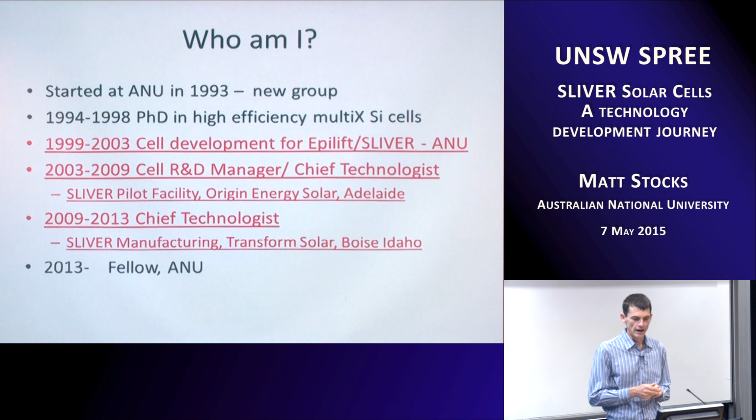I was lucky that there was a project starting, looking at single crystal silicon and trying to make very thin layers of it — the Epilift project. I started in that, which migrated into Sliver. A couple of years into that project, the idea of Sliver was born, and from 2003 through to 2013 I was involved in the cell R&D, and ultimately was Chief Technologist for Sliver technology at Origin and then Transform Solar. When that wound up, I came back again to the ANU.

So where did this all start? It all started with Epilift technology. The interest very much during the late 90s was: how can we reduce the cost of silicon? How can we produce high quality silicon layers which are thin and lower cost than traditional multi and single crystal silicon? The concept we were working on was liquid phase epitaxy.

Basically, you take a metal melt, dissolve your silicon in that metal melt, transfer that metal on top of your silicon, cool the melt down, and the silicon crystallizes out on the top surface. We make our solar cell on that top layer, and then we remove that top layer and reuse the substrate. That was the basic concept involved.

So why would somebody get involved in that technology right at the start? It was a really interesting time in terms of energy, because there was a really interesting greenhouse issue — this was really the start of companies starting to take it seriously. Origin Energy, despite the very negative views they're taking on solar in the marketplace now, were very focused on greenhouse because they saw themselves in a better position than most energy companies in Australia, since they were in gas rather than coal.

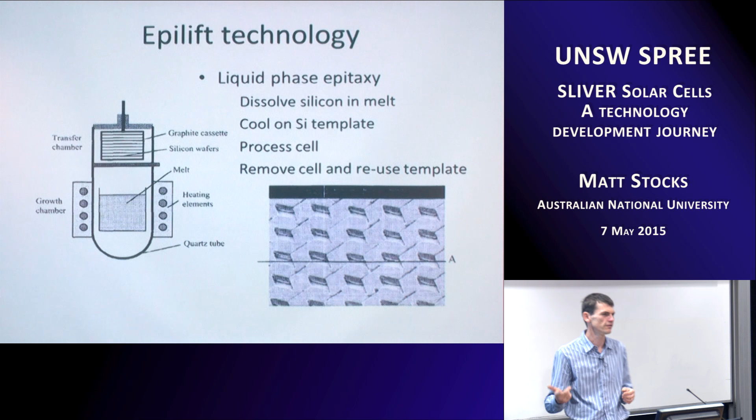So what happened after that? Epilift progressed quite well going through to 2000, and then the decision was really around how do we scale this thing up. What we had was a technology which required custom manufacturing tools — we had to design and build a tool that could take multiple wafers, insert them in the metal melt, grow our silicon, and get them back out again reliably. And we had to do this again and again, because there was only value in it if we could reuse that template multiple times.

So Andrew and Klaus were coming on the train back from Glasgow, sitting there thinking, look, it's working, but is there a better way we can do this? What they really focused on was: what's the cheapest way to make silicon? And the cheapest way is the way the solar industry does it — in terms of cost dollars per kilogram, multicrystalline silicon and CZ silicon were the cheapest. So they started to think about ways to use conventional silicon but with a much thinner quantity of silicon in the final device. This is what led to the birth of SLIVER technology.

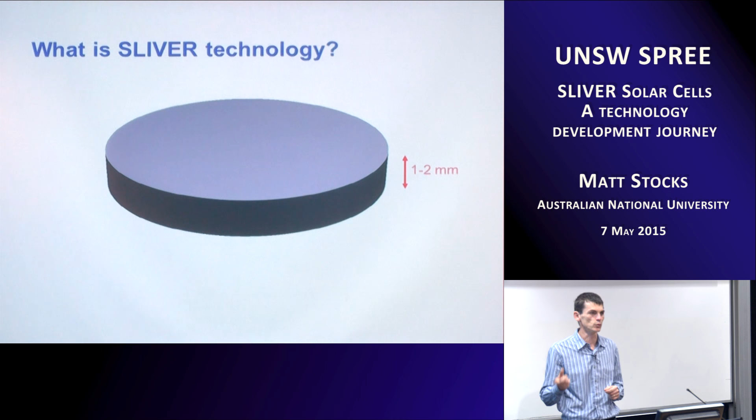With SLIVER technology, we take a standard CZ wafer, except instead of being 150 to 200 microns thick as the solar industry uses today, we're taking something 1 to 2 millimeters thick — quite a thick wafer. Then we micromachine it. We're taking advantage of the fact that silicon has this amazing property that in an alkaline etch, one crystal plane etches much more slowly than the others. We use this all the time for standard solar cells: if we take a 100 silicon wafer and etch it for the random texturing process, we create these 111 planes all over the surface which don't etch, compared to the 100 plane, the downward plane, which does etch.

With SLIVER technology, we've rotated our wafer on its side so those 111 planes are vertical, allowing us to etch very deep grooves, 100 times deeper than they are wide. If we do that cutting at a very narrow pitch, something on the order of 100 microns or less, we can get these strips of silicon forming within our wafer. This is what we're interested in — making solar cells with SLIVER.

The idea was then to process the cells inside the wafer, so you do all your cell processing while all those strips are being held together. And then at the end of the process, we can take that cell, tip it on its side, and get the big area increase that you achieve through this micromachining process.

So kind of imagine it a bit like a deck of cards. You take a deck of cards, it's all nicely packed together, doesn't take up very much volume. Take them on their side and you spread them out, and suddenly you get this huge area increase.

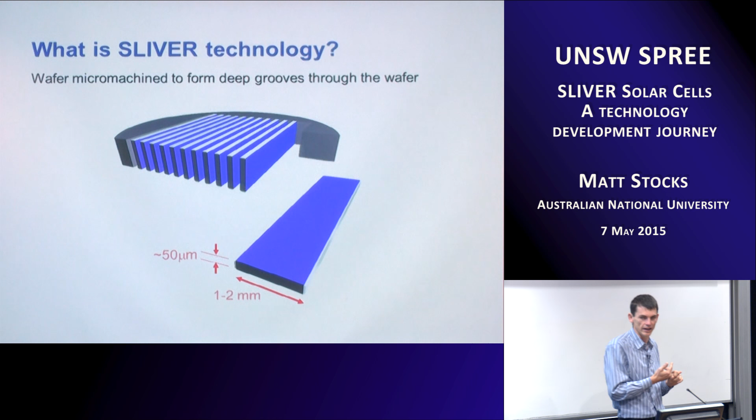And that's what SLIVER is about. We're taking the silicon, slicing it up into these narrow plates, doing all the processing while they're held within the rest of the wafer frame, and then separating them out and spreading them out. So we're getting both silicon saving, and importantly, we're also getting a number of watts out of each wafer that we process.

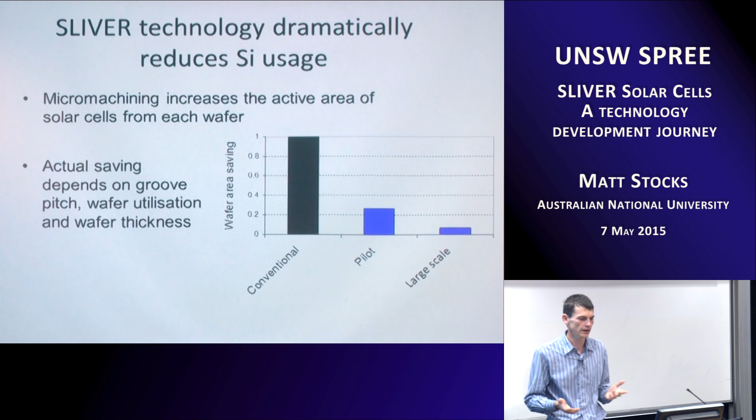What we did when we were at the initial phases of this, we already had got things down to around about 2 grams per watt, and then by the end of the process we were getting down to less than 1 gram per watt. So it was all about originally focusing on silicon saving.

The cell design also, because it was a very thin cell made out of single crystal silicon, it was very easy to make good cells. And we were naturally set up to have high voltage because we had a very, very thin cell. It was also very easy to get very good surface passivation on the surface of our cells.

We could do all of our processing in furnaces, LPCVD furnaces, oxidation furnaces, to get our processing down into the grooves of the wafers. Very good current. The cells are very, very thin, and we've got a collecting junction on both sides of the cells, so we have an emitter both on the top and on the bottom. So we only need 30, 40, 50 micron diffusion lengths to get the current from the centre of the cell out to our junction, so we get very good collection efficiency.

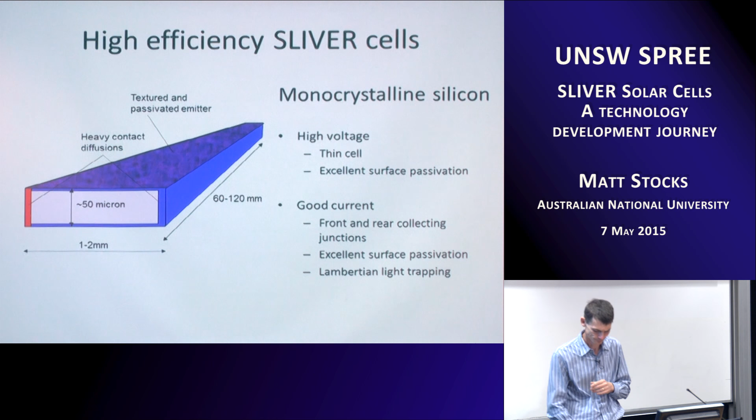It also enabled us to think differently about our module design, because we had a bifacial cell, we could actually try and use both sides of the cell. You can imagine when we take a cell out, it doesn't matter which way up the cell is—it's completely identical in terms of the processing. This is a truly perfectly bifacial cell.

So if we wanted the highest efficiency, we could just pack all these cells as close together as possible and cover the entire surface of our module. But we could also save our silicon even further by spreading the cells out.

So what we did particularly early on in the process was to actually take the cells and separate them and put a white rear reflector behind the cells. That way the light that hit the rear reflector was reflected back onto the back side of the cell, and we could then recover some of the light. You don't recover all of the light though, so it's back into a trade-off situation.

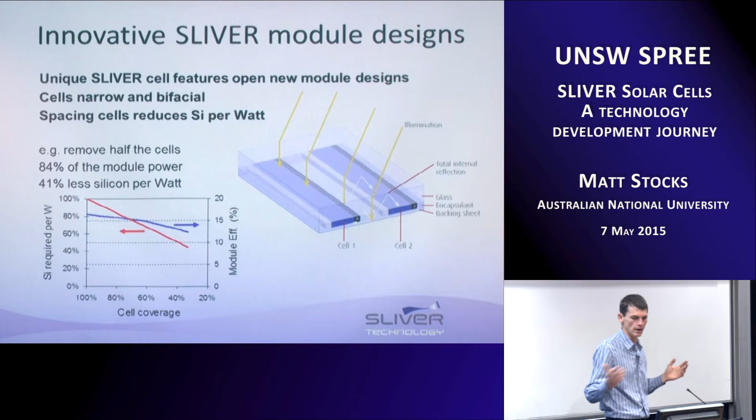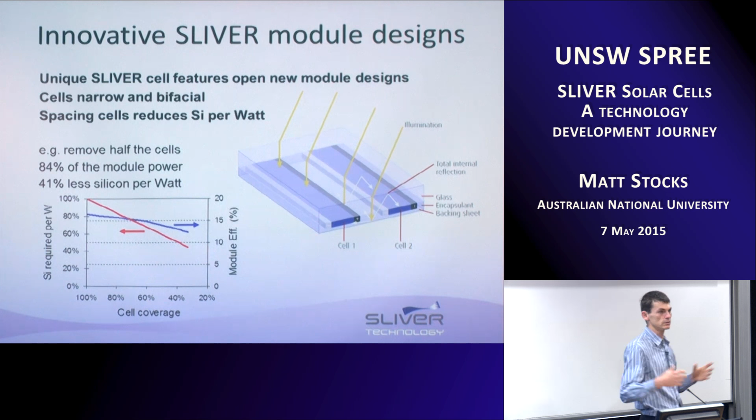By spreading the cells out—so the red curve there is imagining the cell, spreading the cells out and reducing the amount of silicon—as we spread the cells further and further apart, what we're getting is silicon saving, but the efficiency drops off much more slowly. So in terms of grams per watt, it's most beneficial to spread the cells out; that's the best economics.

So, a few years of playing around with that in the lab, we basically said goodbye to Epilift, threw it out, but kept all the milestones. We took the exact same project and said, instead of doing this with Epilift, we're going to do it with SLIVER technology. One of the reasons we could do that was that everything in terms of the cell processing was using standard equipment.

It was 80s vintage standard semiconductor processing equipment. It wasn't solar processing, but it was standard semiconductor processing equipment—using things like plating benches and wet benches for micromachining and furnaces and all of those sorts of things. We didn't have to build new kit, which meant that we could very rapidly use the existing facilities to process this cell. Unlike Epilift, which really meant that we had to go out there and custom build these new tools.

So we look along the experience curve a little bit further. Everything's behaving itself pretty well. The red dotted curve represents the general assumption that as an industry builds more and more of something, we get clever at building it and become more efficient. There's this classic experience curve, and what you tend to find with a lot of industries is that if you take the log of the amount of stuff you make versus the log of the price, you end up with something like a straight line. Solar, after the first few years of coming down, was behaving relatively well in terms of that curve.

We did our modelling and had a look at what we believed we could achieve with SLIVER cells, and there was a really good fit. There should be a really good margin in this business if we can succeed. So Origin committed to building a pilot facility in Adelaide.

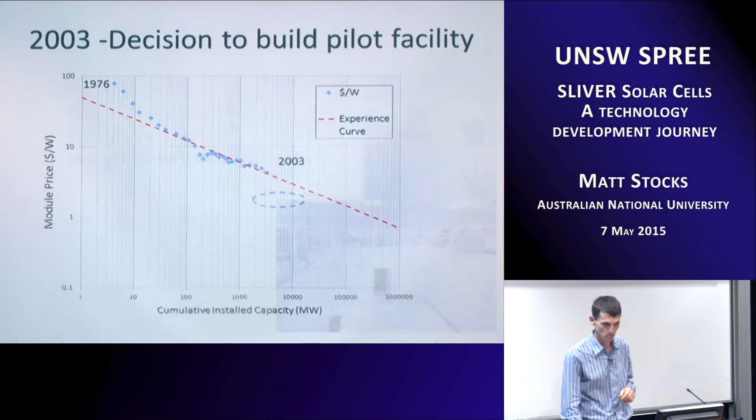So why Adelaide? Close to the researchers? Nah, not particularly. Good quality water? Everyone knows Adelaide water's top notch in an Australian context, no salts or anything else in it, nice and easy to process. Lots of high-tech industry, really good at making cars, pretty high-tech? Not really any of those reasons.

What I'll come back to is a theme I'll return to a few times: it's all about people. And in the end, the boss makes the decision. He wanted something that he could keep an eye on, so he wanted something he could jump in the car and nip down to see how the guys were doing today. That really was ultimately the decision why we were in Adelaide.

We had a look at Melbourne, we had a look at Canberra, we had a look at Sydney, but the generation group, which was the part of Origin all about developing new business, was based in Adelaide. They came out of South Australian Gas, and that was where the energy part of Origin really started. So that's where the head office was based, and that's where we ended up.

We started completely from scratch. We did a search for sites and ended up with an old paint warehouse. The reason it was great was that it was bunded. They didn't want spills or anything going wrong and escaping into the countryside, so the entire warehouse was bunded, which was ideal for chemical processing. Everything was going to be contained within this warehouse, and it was built completely from scratch.

So what you can see there is the overall warehouse. During the build, this is the assembly area where the modules were made, and this is the clean room space within that. And this is the yellow room for doing the photolithography during the build phase.

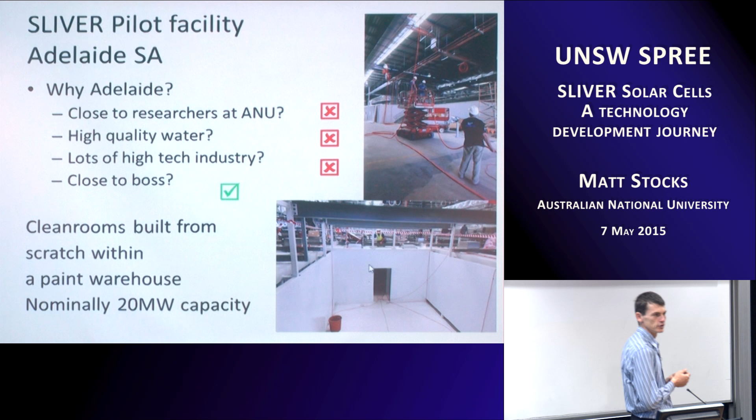So we progressed through that, and we had these two areas. We had the clean room area, which you can see, a lovely fishbowl arrangement, all set out nicely with the window so you could take guests in and show them what the monkeys are doing in the zoo. On the right-hand side you've got the assembly area, which was pretty much just an office space, class 10,000 to 100,000, for building modules. We weren't particularly worried about cleanliness there anywhere near as much as on the other side, which we treated much more like a semiconductor processing space.

Quite quickly we built the first modules. The first part of things, we took things from the lab and threw them into manufacturing, and it came together remarkably quickly. The original idea was not to certify, just to get a very limited number of modules out there with some controlled buys, get a couple of 110 watt modules out into the market, and just see what happens.

It didn't keep going in terms of plain sailing, and this is where we really ran into the challenge of guys who are in academia and used to being in the lab versus the reality of how you make lots and lots of this product—the thinking really is quite different. The first issue we started to crunch into was defects, particularly defects during the etching. Generally when we do processing, we don't care too much about one side of a wafer, and a lot of the semiconductor processing equipment is very much focused on stuff going on the top side.

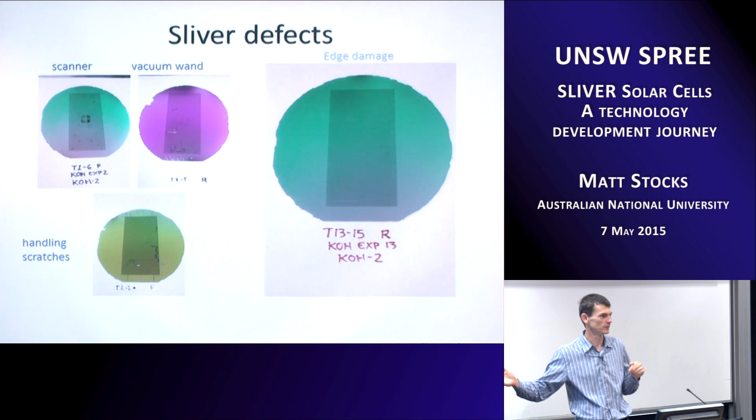And of course we then stick them in KOH etching for a long period of time, and we take what looks like you can't see the scratch at all to suddenly it just blows out the entire wafer.

We had a pretty poor cell design. We hadn't really thought through the issues. When we're building things in the lab, as long as some of them work, it's great, and we can sort through them and go, yep, enough of them work. Sometimes it does, sometimes it doesn't.

And the biggest one that we got caught was we were trying to use one of our masking layers for multiple purposes. We would keep using it for both our etching process, and then we were trying to retain it later on to define where our contacts were going to go. So we had this silicon nitride layer, which was on the top of our wafers.

We were etching down between these grooves, and there was a bit of undercutting. It wasn't much, only 5 to 10 microns of undercutting, because we wanted these really deep, narrow grooves through our wafer. But we had then this uncontrolled breakage - these would come off and land wherever they like.

So sometimes they would land nicely in the middle of the wafer and it didn't actually hurt anything, it didn't cause a problem. But some other times they interfered with the process. This is a good example of it here on the left - we had this nitride flap sitting on the surface.

We tried to do an oxidation to passivate the surface. The nitride blocks that oxidation. During some of the other processing, the nitride flap lifts off a little bit. There's no longer anything on the surface to passivate and protect it, and we get unwanted plating on those locations, which some of the time then also leads to shunting.

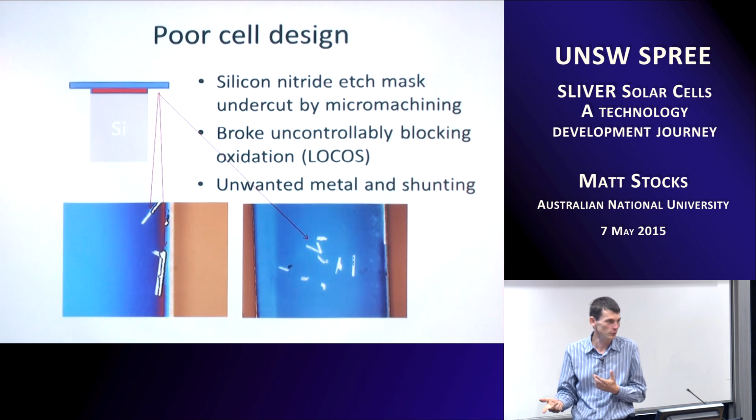So we started off with that sort of a problem. We also had a really bad module design.

What I talked about before was the fact that we spread the cells apart and that we wanted to get light reflected from the rear. In order to do that as efficiently as possible, we wanted that reflector to be as far back as possible, because if it was too close to the cells, it was hard for the light to get sideways - too much of the light was just going back out the same hole that it came in.

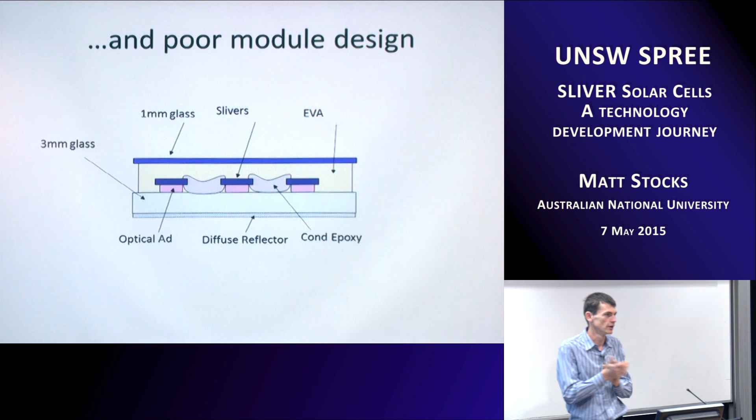So naturally, we went, well, we can just put that on glass. We'll put that separate from the cell, and to try and keep the weight down, we'll just put a thin layer of glass - a 1mm glass on the front surface. Of course, you can't toughen 1mm glass, it's too thin, so we can only use standard glass, but it's fine. We've got a 3mm glass on the rear - that's going to do all the strength work for us.

But we quickly discovered, once we started to go into the reliability side of things, that actually this doesn't work. We find that that front glass layer stresses too much. Hail test is a total failure - the glass separates and fails on that test. And even the handling, in terms of the glass suppliers shipping them to us, we're finding a lot of product was getting broken simply in the transport of those materials.

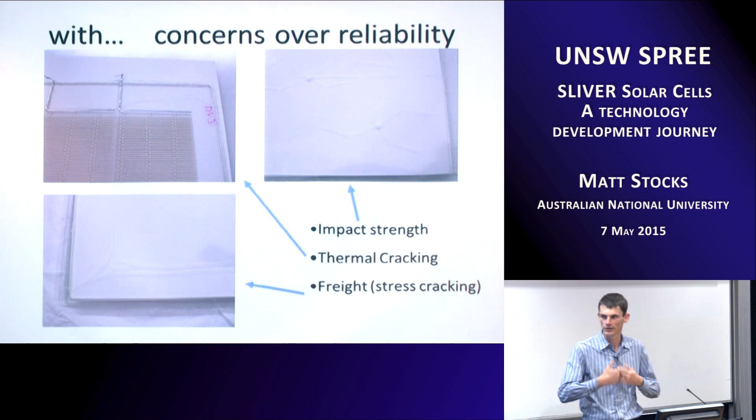So the academic side of us, in terms of where we were at the ANU, was all about best performance, how can we get the best out of this, and it wasn't being driven by the manufacturability. And so there was a lot of having to rethink some of the approaches that we take to things in order to solve those sorts of problems, and great issues in terms of the rear reflector.

The other side of things, obviously, is automation. The cell process was pretty much standard equipment - we didn't have to buy anything special. We could go to any second-hand equipment vendor. We didn't even have to buy a new kit, we could get old 150mm furnaces, old photolith gear, all the rest of it. That side of things was easy.

As you'd be aware from the piece going around the room, we've got a lot of things we need to handle. We need to move large numbers of devices in order to build a module because we've got these very, very small cells.

So how do we do that? Well, the first approach we went was automation. We're handling lots and lots of things - automation companies, they're the guys to go to and throw dollars at the problem. Here's $1 million, give us a machine that's going to take one of these wafers and make one of those modules that you got passed around.

And in some ways that worked well. There were aspects of it that were good. Getting the cells out, they did a really, really good job at - they were good at separating the cells from the wafer and getting them into place.

Where things went pear-shaped was actually moving them around the place. Because nobody in the automation companies had handled something which is 50 millimetres long, 1 millimetre wide, and 30 microns thick. They're springy, they want to bounce all over the place. You stress them wrong, they break. They've got electrostatics - if you put one of these things in a petri dish, it's just about impossible to get off. All of these things are working against you in terms of actually handling them.

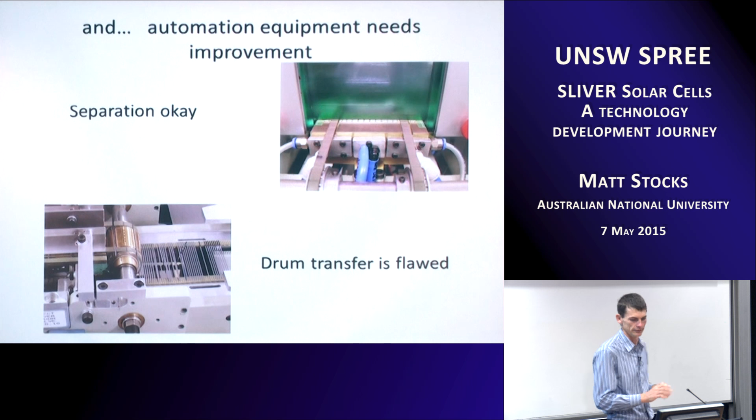So we had to go back to basics. It was something we had to really just go, this is not something we can do outside of house - we have to bring this back in-house and do this internally.

So the approach then was, well, let's not go for building $1 million machines. Let's go back to basic robotics. What we started off with was a basic SCARA robot - your $10,000 robot. It's basically a pivot with an elbow on it, so it's something that can move around in one plane, and then there's a head on the end that can move up and down if you want your third dimension. They're a really cheap robot, very easy to program - there are hundreds of automation guys who would tune one of these things at the drop of a hat.

And what we then had to focus on was how do we actually handle these cells? How do we separate it? How do we test it? How do we place it into the module? What we did was we just slowed right down - that was the approach we had to take.

This is the sort of approach we had - a very, very slow, methodical approach to taking the cells. Basically the head's going in, taking a single cell, passing it over a light source, doing an electrical test, and then placing the cell onto a sub-assembly. So rather than building whole modules, what we built was sub-assemblies - what you passed around was a single sub-assembly. We're building those, and then we join those together to build modules.

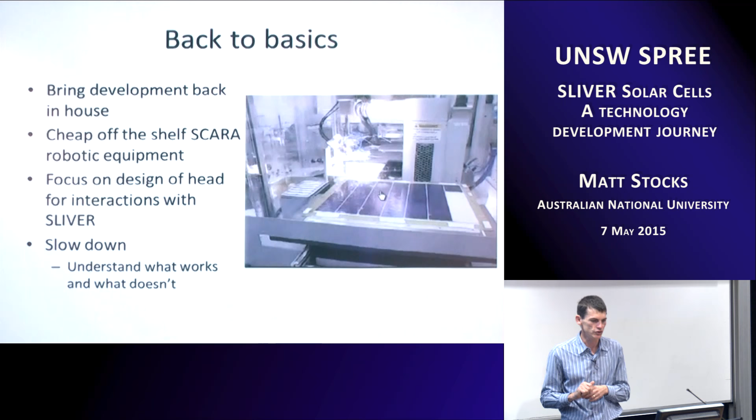Surprisingly, even at this pace, because the robots are so cheap, the economics are okay. But it feels really, really clunky. It feels really, really slow.

But the important thing there was all of the know-how that we developed was all around the head that interacted with the cells - how do we pick this cell up, how do we do an electrical test, how do we get it back onto the module so it ends up in the right place. It was all focused on the engineering just in that head of that robot.

Once again, they just didn't have the idea of what things worked and what things didn't work, in terms of when things would break, when cells would go in the wrong place, and all those sorts of things. So what we found again, we had to step back in-house.

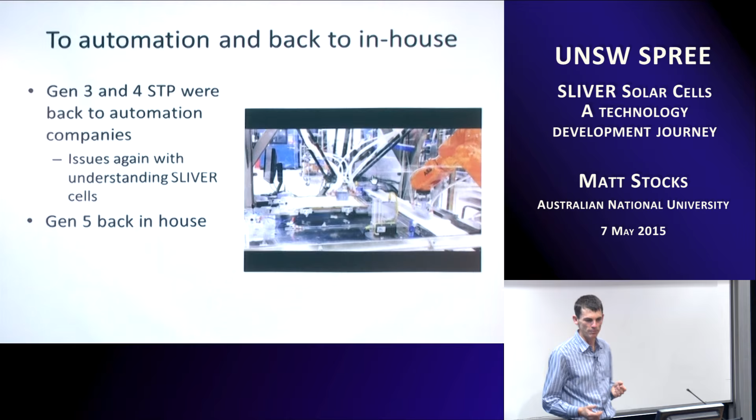Ultimately, again, using standard off-the-shelf equipment. This is a pick and place tool, one of the tripod arrangement tools, and what you'll see here once that gets going. So what this is doing now, we've got 2 parts to the process.

The orange robot on the far right is just grabbing a collection of sliver cells. There's an array of grids, taking out 20 at a time and placing them on a conveyor belt. A vision system inspects them, rejects anything that has a scratch or is thin or has a defect or anything along those lines. So you'll see some cells getting passed through, and that head is very quickly picking up and aligning 24 cells at a time.

So in that time that robot is going over there and grabbing off the white belt, it's picking up 24 individual cells, adjusting for the position of every single one of them, and then placing those across. So now we're getting into something which is starting to feel much more like the same sort of pace of build that you would have with a conventional large area cell operation.

But it was a really interesting process to go through to discover that, hang on, the experts are actually not out there. There isn't actually anyone who's done this before, and we need to develop this expertise in-house. And it was the guys who learnt through all of those processes of what didn't work with the automation tools and what did work in-house, and learning those sorts of things, which really enabled us to get to the sort of tools that were suitable for large-scale manufacture.

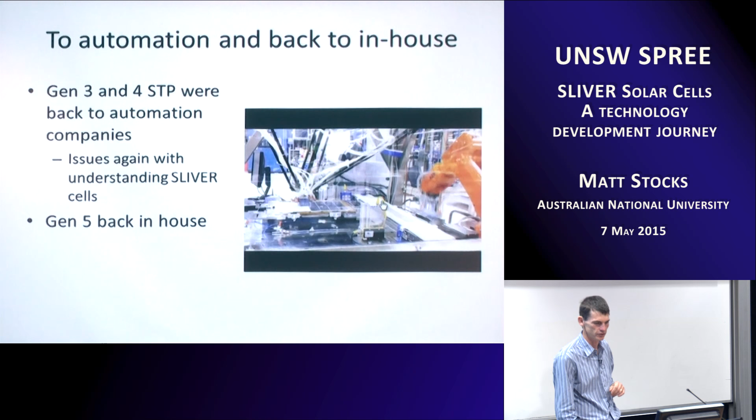So over time, the next couple of years, the problem started to come under control. One of the things we have to watch is that we probably damaged our confidence with our stakeholders a lot during that period of time, because one of the things we did was we promised, yeah, we can do this. We showed all the upside, but we probably didn't communicate well enough the downside.

Okay, so we didn't hit targets. We were still progressing well in terms of the potential to hit large-scale manufacture, but we started to put doubt in people's minds - do we actually believe these guys anymore? Because we started off before we built it saying, yep, $19 million, we're going to build this pilot facility, you're going to have 20 megawatts of production in 2 years' time, easy. Actually, what we spent was 2 years troubleshooting a line and starting to get things going.

So there are elements where you have to sell a business, describe the upside and get people to buy in, but we also have to make sure they know there are downside risks, so that when they do hit them, they're not suddenly going, hang on, I don't know what's going on anymore and I don't have confidence in you in terms of delivering those.

So we started to get really good production cells. We worked out a much better cell process that didn't incorporate those nitride overhangs. We incorporated a texturing process into the cell process, which is really important because we've got very, very thin cells, so we really needed that in terms of getting the efficiencies up.

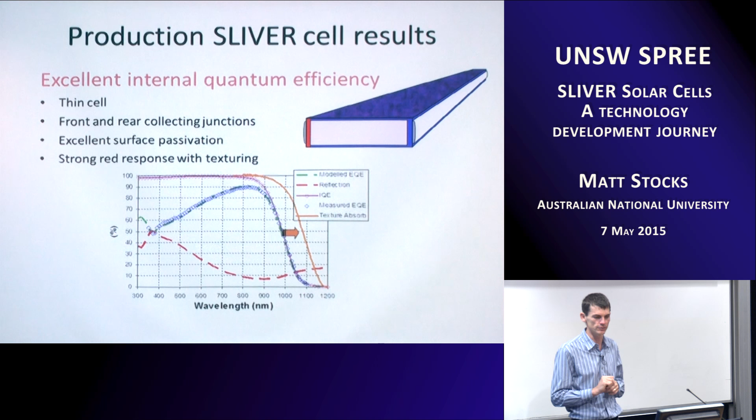And so around the 2005, 2006 period, we're starting to hit efficiencies around the 19% mark, which was enough to start to get people interested and opening their eyes to the potential of this technology. Particularly around that time, it's very high voltage for those cells, which also gave us the benefit of a very low temperature coefficient.

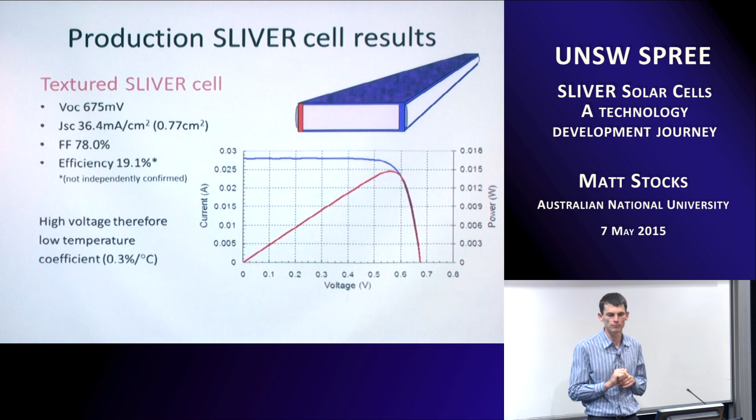We're quite robust to material quality. So we started off with float zone material, because float zone material's easy. We started off with that at the ANU, and when we transitioned to the facility in Regency Park, we made the move from 4-inch to 6-inch because bigger wafers are more economic, particularly around the processing side of things. But we stuck with float zone to begin with, and then we managed to make the transition to CZ as well without having too big an impact.

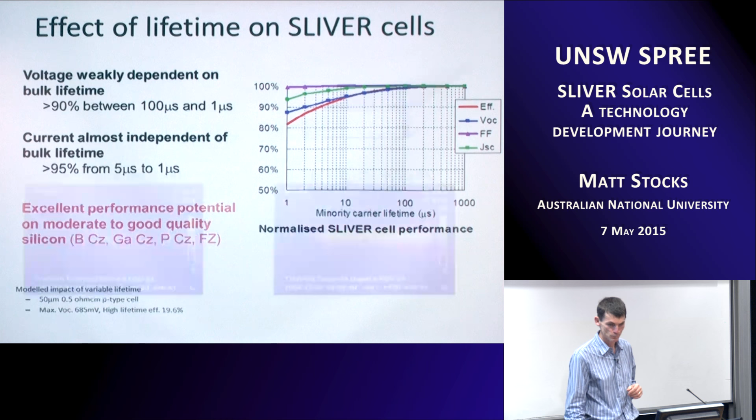We also engineered the cells so that within the device itself there was a reverse breakdown protection. By extending our emitter to meet the heavy doping under the base contact, we could form a tunnel junction at the corners of our cells. By doing that, as long as we can control that doping to a level, it didn't affect the forward bias performance of our cells. It was a tunnel junction that once we went about 6 volts in reverse, it would turn on.

That was really important for us in terms of the design of our module, because we had a very different module design. As we'll see in a moment, we build voltage and then connect cells in parallel. So it's very different to a conventional module, and we needed to ensure that if there were some strange current paths within our structure, that we could protect the cells.

What you could see here is as you push the cell into reverse bias, in this bottom left case, we're pushing 3 times ISC and the cell's barely warmed up, everything less than 40 degrees. Even if we pumped 15 times the short circuit current of an individual cell, imagining lots and lots of current being fed into one bank for some sort of defect or other issue, temperatures were pretty controllable.

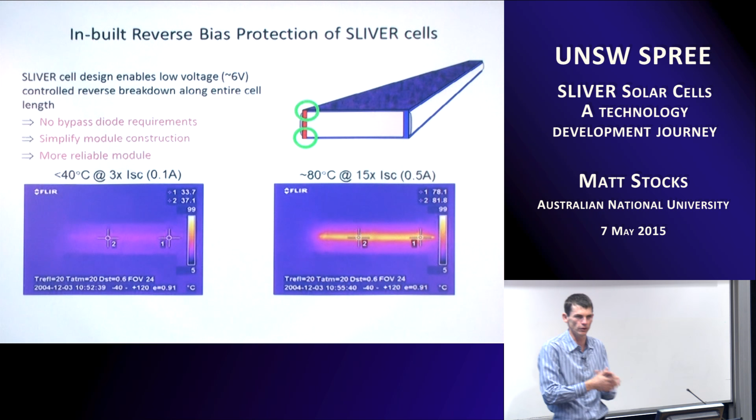And you could see the cell glow up as you increase the current. It would turn on at one point at something like 5.8 volts and then gradually at 5.9 volts, the next section would glow, and then at 6 volts. You could control this along the cell and so spread the load of any heat being dissipated within the cells.

So marketing loves anything that says high performance and good and high efficiency and silicon and low reverse breakdown and perfectly bifacial. They're looking for all of those sorts of terminologies because marketing wants to differentiate your product from what else is out there, okay?

Particularly for a new technology like we were, everything was focused on trying to build SLIVER as a desirable product. The interesting thing is we also decided to go for a commodity product. Everything in terms of those cost curves was all about glass modules. But we had all of these things, bifacial cells, thin cells, flexible cells, the thing that is being passed around.

But marketing always came back to the commodity product because it was easy. They could look at this market curve, see the growth, and know we can sell everything we make, okay? And so everything we focused on was focused on that commodity product.

So however we then wanted to make a bigger module, we were taking these individual building blocks that you've seen passed around, and we just connect more and more of those in parallel. So we'd have a fixed voltage from whatever our subassembly was, and then we'd build that up in parallel. Let's skip through.

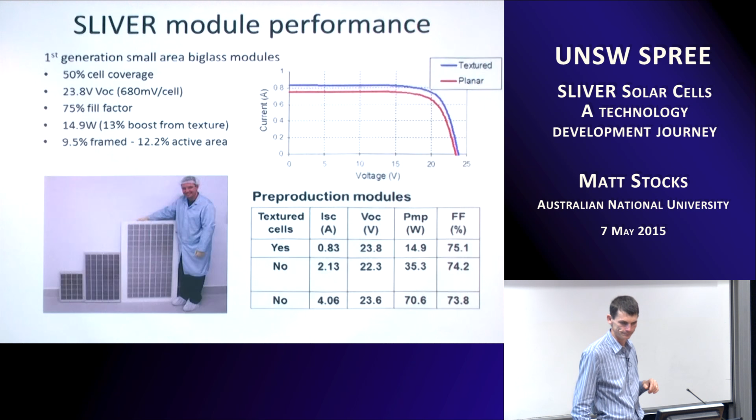This then meant we could get onto some of the other things that marketing really wanted, and that was a demonstration of reliability. We had a product which was completely different to what everyone else had seen. Everyone looks at it and says, you've got thousands and thousands of connections, how can you possibly make that reliable? You've got 50 micron thick cells, how can you possibly make all that reliable?

So again, we made the shift back to saying, okay, what are the things we can control and take from what everyone else has already learnt? We went back to a standard module design: 3mm front glass, EVA cells, EVA, Tedlar backsheet. We went back to all that because we know that's reliable. That's the thing that everyone knows works, and everyone's spent 30 years showing it can last for 20, 25, 30 years in the field. It all came down to how we build the building block for creating those.

So the subassembly that was being passed, that was our core building block. If you turn it over, you'll notice it doesn't look the same on both sides. One side kind of looks out of focus. On that side we've got fiberglass - crane glass is our substrate that we built all of our subassemblies on. We're placing all these cells on this fiberglass shim, and that was okay because that fiberglass shim was actually being put in modules by people. People were having problems with cells cracking, so we're putting that in there to avoid the thermal expansion inside the module. It was actually helping control the expansion and contraction of the module.

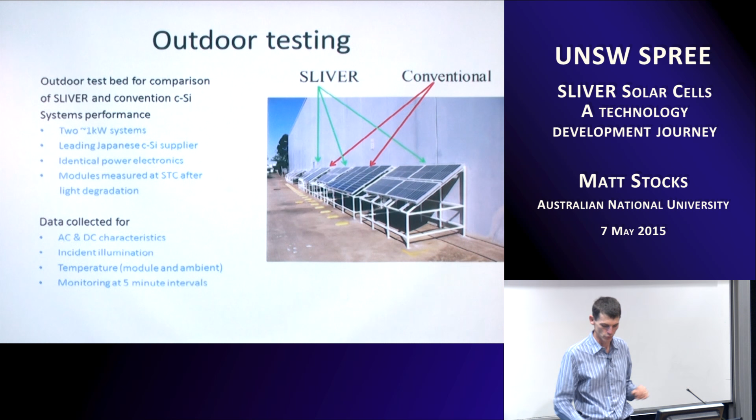Marketing then wanted to say, so how does it perform compared to everyone else? You need to be able to say, I'm at least as good, if not better than the competition. So then you've got to do extended outdoor testing. We basically set up at our Regency Park site - this is our warehouse, the north-facing wall. There we set up a conventional Sharp set of modules and tested them straight against SLIVER, looking at results over the year. Again, positive news for the marketing guys - we got better energy yield than the standard one, and that's all about the high voltage. Because we've got a high open circuit voltage, when things get hot, you lose less voltage than a lower voltage competitor will. That's really where most of our gain was - we were getting much better voltage out of our modules on the very hot, bright, sunny day, which is really where you want your performance to be in terms of getting the most energy out of your system.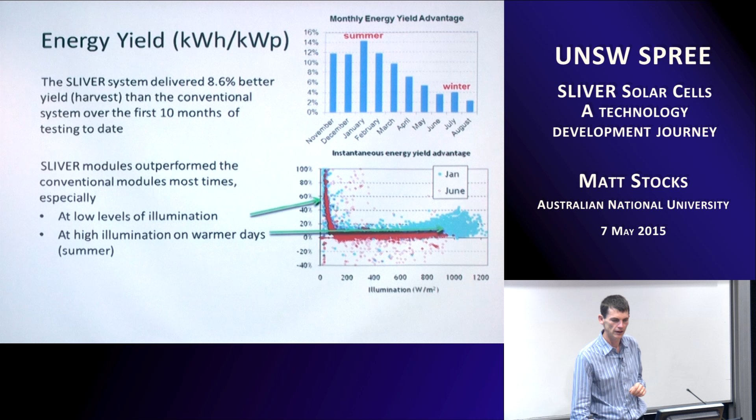The other thing marketing loved was partial shading. One of the things about the sliver modules is that all those banks were connected in parallel, so we're adding the current of all those individual strips or banks together, rather than a series connection where all the cells are in a single series string. That meant we could shade any one bank, or part of one bank, and all you lose is that one bank. So if there's a leaf sitting across one bank, we'd have 6/7 of the power. If we covered two, we'd have 5/7. We didn't have any blocking of one bank talking to another.

Marketing loved this, it was different, and this is something they really pushed in terms of Sliver to try and differentiate it as a product. But in the end, we're still selling into the glass commodity game. We're not developing anything that looks different. It's still a me-too product.

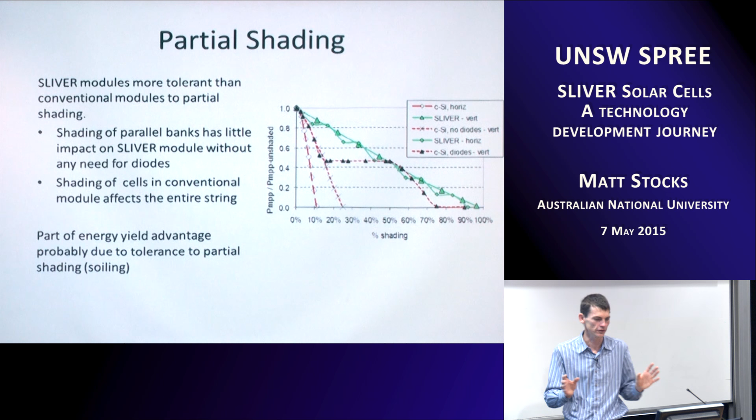So again, all the things marketing loved, we had to chase after. The fact it was monocrystalline silicon meant we didn't have to go through the thin film story - silicon's reliable, everyone understands that. Demonstrating reliability, handling all of these contacts, lots and lots of contacts, was actually good for us, because we had 3 contacts from every cell to every other cell.

If you look at the one passing around, because we're doing screen printing, it doesn't matter whether we do 1, 2, 3, 5, however many contacts - it's just an economics game. For us, 3 was actually the best from an efficiency-cost trade-off, which meant if one failed, so what? Two failed, so what? We actually had something with some redundancy built in.

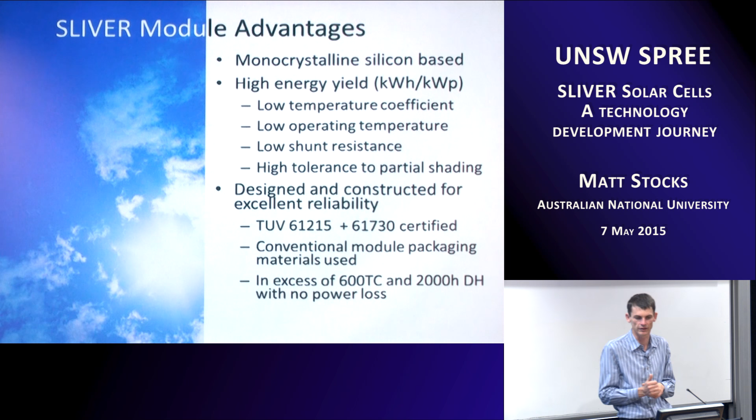So what happened during the next phase? Looking at the period through 2003 to 2008, we're starting to get our technology bedded down. People are starting to get confident that we can make these things. It's time to expand.

Adelaide wasn't big enough. The facility we had there was never going to get us up to large scale. We were really looking at making the transition from 6-inch to 8-inch wafers, from 150mm to 200mm wafers, as our next phase. That's where the economics was looking a lot better.

And it really didn't make sense to do this in Australia. We don't have a semiconductor industry, we don't have really good support for high-tech manufacturing, we're a long way from the rest of the world, and we're also going to have to ship everything around the world. So despite the fact that Origin was really passionate, and we were really passionate, about wanting to do manufacturing in Australia, we never got to a point where that could work.

Suddenly silicon was a constraint. Sliver, low silicon - woohoo, we're excited, this is great! Actually, it didn't work. Paradoxically, the silicon shortage really, really hurt us, because nobody wanted to supply to us. Everyone's sitting there going: every bit of polysilicon I can get my hands on, I need to sell to the big guys. We need to keep supplying them, because if we lose them, we're done.

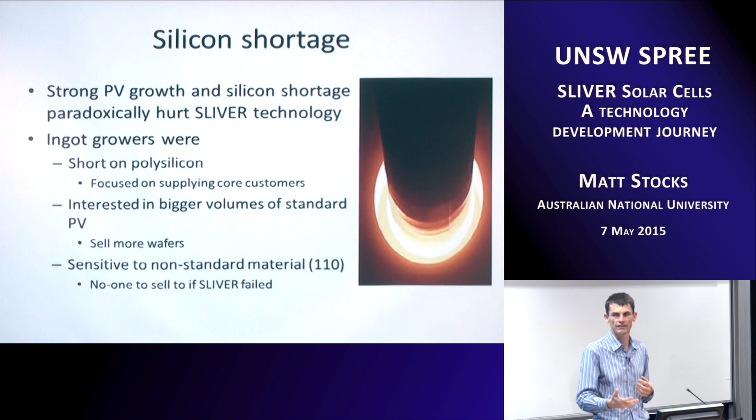Silicon shortage was great because it was keeping the module price up, but it was really hard for us because we had to try and get somebody to believe in our product and believe that what they could get out of us, because we were willing to pay more for our wafers, was enough for them to take on that risk.

Why partner? Origin, we didn't go it alone. Origin very deliberately tried to find partners, and we spent most of 2006, 2007 chasing down partners. This was all about managing risk. Origin are an energy company, they're not a manufacturing company.

Nobody had the feel for manufacturing. They couldn't look at a spreadsheet and go, yep, that makes sense. They couldn't look at a line and go, yeah, you guys are doing a good job, or you're not. They needed somebody else to say, hang on, this is okay.

It's not that they weren't willing to take risks. They do it all the time. They build co-fired gas generation plants - was a bit of a loss for them in terms of where things are at the moment, they're not being used - but they build oil and gas fields. They take big risks, they drill holes in the ground and hope. But they understand that, they know what the risks are. They've done it lots and lots of times.

This was outside their scope. And it's the same, I think you get the same sense. Something you do every day, you go, yeah, that's fine, I can handle that risk. When it's something that's kind of outside that, you go, whoa, not so sure about that. And that's what we got caught with.

So Origin wasn't willing to commit until we had somebody else on board. We went through the search of semiconductor and solar companies and technology companies, and we went through probably three serious detailed negotiations. Took six months building up business plans, agreeing contracts, getting everything lined up, and everyone fell over on that final decision. When it went to the other company's board where they had to sign up the big checks, it all fell in a hole.

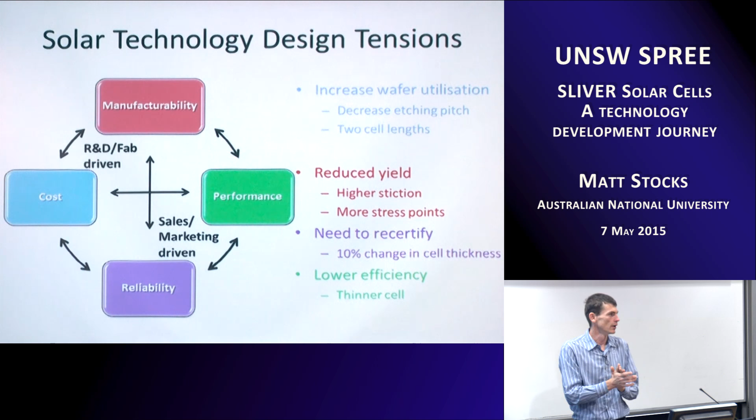Reliability-wise, there's a 10% change in cell thickness, you need to recertify. We can't just do this independently. Our efficiency is going to go backwards. If we go for thinner cells, efficiency is going to go backwards. We need to have all of these chunks working together for the business to decide that these work. No one can operate in isolation and just say, okay, I'm going to go full steam ahead, I know this is a huge cost saving. We need to take the rest of the organisation along on the journey. Goal alignment is really important.

We all considered ourselves one group - Origin Solar and Transform. But there was amazingly little interplay going from one side of that wall to the other. There were people who saw themselves as cell people, and I saw myself as an assembly person.

Well, for wafer, you've got a wafer yield - you get as many wafers out as possible with as high a yield as you can. Assembly, you get the highest yield - every wafer you get your hands on, you turn into a sub-assembly. Module, how many sub-assemblies can you turn into final modules? How many of these fail?

Feels like the right model. Everyone owns their own stuff. Everyone likes that one - you've got this nice wall. This is my stuff, I just operate in here. As long as I tick the boxes, I'm going to get rewarded. This is all good. And it just was a total disaster.

Everyone upstream goes, I'm going to reduce the criteria. Scratches are okay, a few cells sticking together, that's fine, they'll deal with it, we'll just push that through.